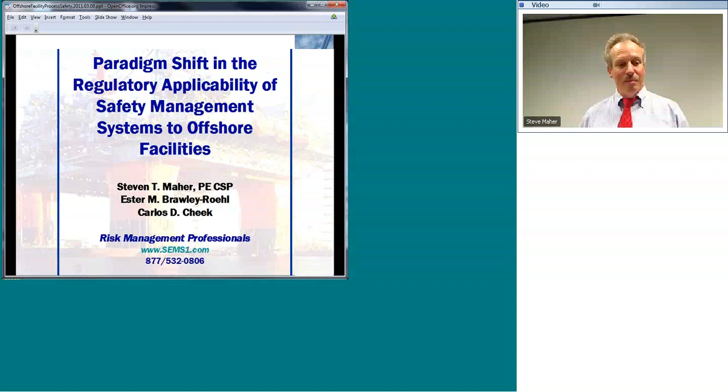What I'd like to do is compare those requirements to other regulations that are out there. With those parallels, I really hope to provide some tips towards effective implementation and how to make the overall program very effective. And of course, I'll be opening up for question and answer.

Okay, let's go to the next item too. What I'd like to focus on is making the audience understand what's been happening and why, and contrast the different regulatory requirements, and also suggest some effective approaches for implementation.

The key events in 2010 that have driven this: 2010 started with a very positive outlook on offshore facilities and offshore facility safety. In fact, on March 31st, the President announced in his speech the expansion of offshore oil and gas exploration, just weeks before the tragedy associated with the Deepwater Horizon accident, which resulted in 11 fatalities, 17 injuries, and over 4 million barrels of oil released in the Gulf of Mexico.

There was a restructuring order for a fresh look at the Minerals Management Service and all the things that were done, and that was completed in May, when MMS was restructured. A moratorium was put into place, and throughout the course of the year there was pretty much a downward spiral towards a very negative attitude, which is how the year ended, towards offshore oil and gas exploration in the Gulf of Mexico. In fact, on October 15th, 30 CFR Part 250 was promulgated, which is basically the SEMS requirements.

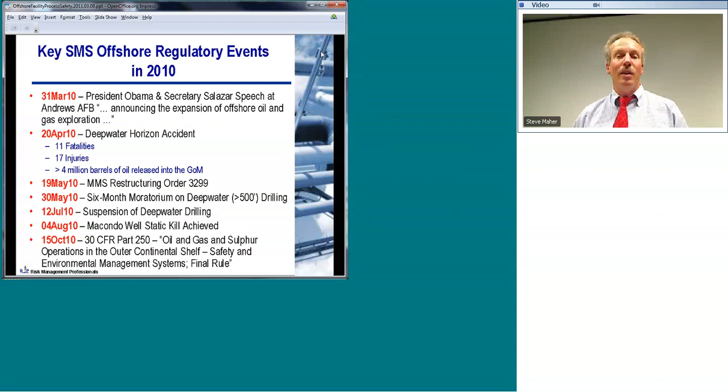I'm not planning to review all the different aspects of the regulation or all the background. If you need more information, there are some references towards the end of this presentation too. www.sems1.com is a good reference; it provides copies of the regulations and also links to all our SEMS Offshore webinar series that provides a lot of background and other tips.

So what I'd like to do is start by discussing what causes accidents and the types of regulations that are effective for addressing those different causes. Accident causes and performance indicators.

Incidents are rarely caused by just a single catastrophic failure, but usually by multiple events or failures that coincide. There's a Swiss cheese model, a spinning disk model, that have been very useful for describing this. Typically, hazards are contained by multiple protective barriers, and the idea is that there are weaknesses or holes in these barriers, and it's when the holes align that the barriers are neutralized and you can have an accident. That's one visualization that describes process safety type events very well, which tend to be catastrophic and involve multiple events happening at once.

The other aspect is different — personal safety. Those typically are more direct types of events. So let's contrast the two.

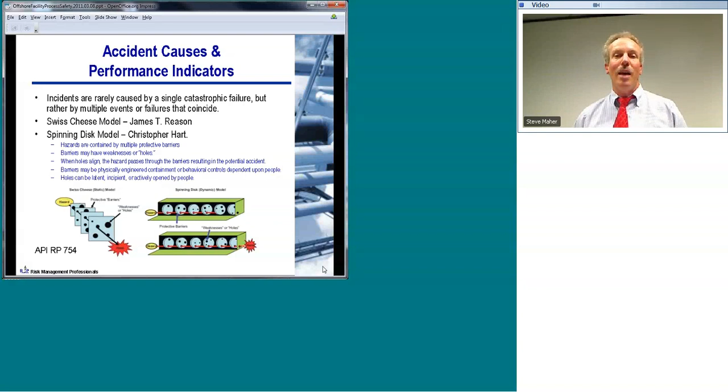General types of offshore facility risks that people need to be aware of are personal safety and process safety. To contrast the two, consequence measures for personal safety are usually done in terms of lost time injuries, whereas for process safety these can be serious injuries, financial impacts, environmental impacts, even fatalities. For personal safety issues, key control measures include design, PPE, and attentiveness to job activities.

Controls for process safety have gravitated towards safety management systems — that's the SEMS acronym I'll use frequently in this presentation — and I'll describe why these are good control measures for process safety type events.

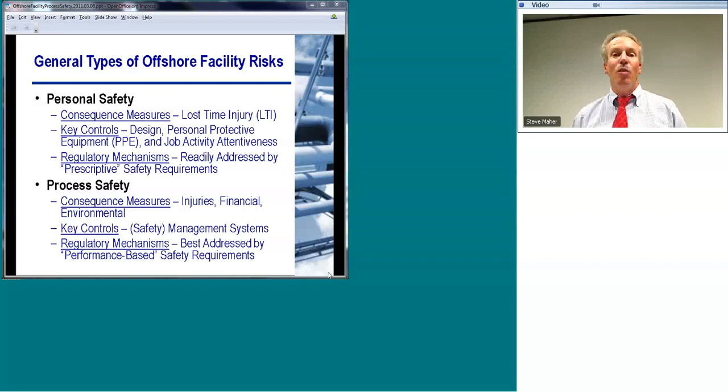For personal safety, prescriptive safety requirements are typically very effective, but for process safety, performance-based safety requirements are typically more effective.

There is a lot of overlap between personal safety and process safety, however there are some significant differences. If you look at an offshore facility, comparing slips, trips, and falls to major accidents, there's a pretty limited correlation between the number of slips, trips, and falls type events and the number of major accidents. So although there's some overlap between the different types of safety, there are significant differences between the two.

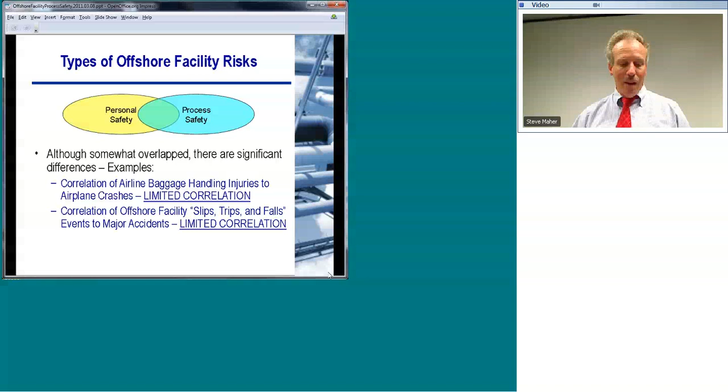What are prescriptive and performance-based regulations? Prescriptive regulations typically state what actions and requirements to do, and they're very specific in terms of what needs to get done. Goal or performance-based regulations look at objectives or the desired outcome and leave the method for achieving those objectives up to the facility operator.

As we discussed before, performance-based regulations are better used for safety management systems types of approaches, and prescriptive regulations are better for personal safety.

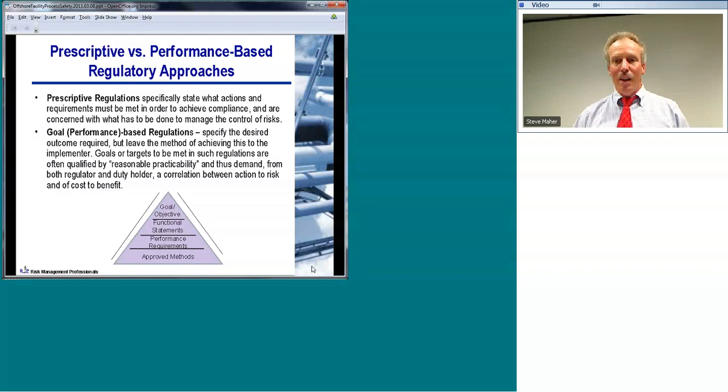For the rest of the discussion, I'd like to focus on process safety issues and performance-based regulatory approaches, and then discuss parallels between the onshore and offshore safety management system regulation development.

We already briefly mentioned the Deepwater Horizon event that happened in April 2010. Let's take a look at a couple of other pivotal events in history that have had a big impact on process safety and performance-based regulations.

The Bhopal, India accident in December 1984 resulted from procedural errors and a reactive chemistry incident that caused a large release of methyl isocyanate, which reacted exothermically with water. This exothermic reaction resulted in a lot of heat, a large pressure increase, challenge of the relief valves, and a release through the relief valves.

A lot of the control systems were disabled, and key protection systems were disabled, both without any management of change program implemented, resulting in 40 tons of methyl isocyanate released into the community, almost 4,000 lives lost, and over 100,000 permanent injuries. It was considered a very pivotal event not only because of the magnitude of the tragedy, but also because people took a fresh look at performance-based regulations and safety management systems.

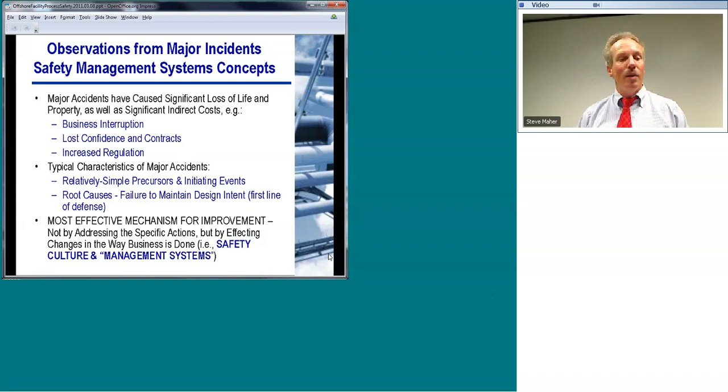Bhopal, India happened in December 1984. And it was very quickly after that, in 1985, that the Center for Chemical Process Safety was formed, and the Technical Steering Committee, I had the privilege of serving on that for several years in the mid-'80s, was formed. And one of the first things they did is they recognized this need for control of safety management systems and having an appropriate control factors put in. And in 1987, they put out guidance for technical management of process safety.

This was a good guidance document put out by the CCPS, which was an element of AICHE. In 1990, the API put out Recommended Practice 750, just a few years later, using much of the same concepts, but focused more on the petroleum industry.

These were initiatives initially taken by industry and, in general, very effective, but their application was optional. So to provide consistency and to avoid a situation where a company that did not want to go through and properly address these requirements so that everybody had an even basis from a competitive perspective, and for applying appropriate levels of safety, OSHA promulgated Process Safety Management in 1992, and EPA promulgated Risk Management Programs in 1996.

All these, for onshore facilities, were driven by events that occurred in the 70s and 80s, the pivotal event being Bhopal, India in December 1984. The important things to recognize are the fact that industry did take an initiative first, and the regulations that came out afterwards closely paralleled what the industry guidelines were, with, of course, some differences, but there are more similarities than differences. So that's the top arrow, and that covers the onshore facility applications and leading to the regulatory environment that we've got now for safety management systems.

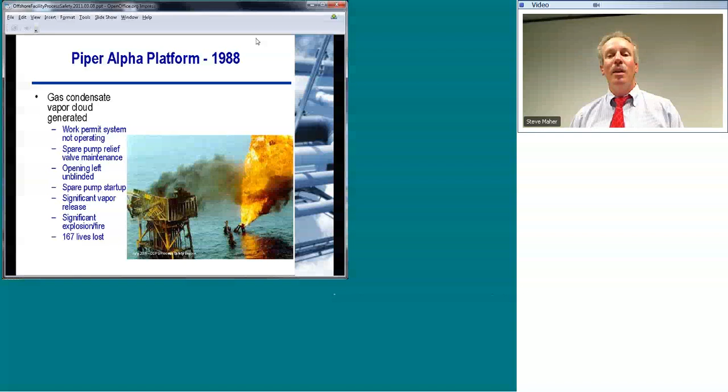Another key observation is that throughout this entire time period, from the mid-'80s to current day, a lot of the details and specifics for developing safety management systems and their various elements - whether for onshore facilities with a wide range of technology applications, or offshore facilities with a wide range of applications - many of the different elements are very common across all these. Thousands of people have looked at these and come up with the elements that are part of PSM, RMP, and SEMS as paramount to implementing safety management systems at a whole lot of different types of facilities.

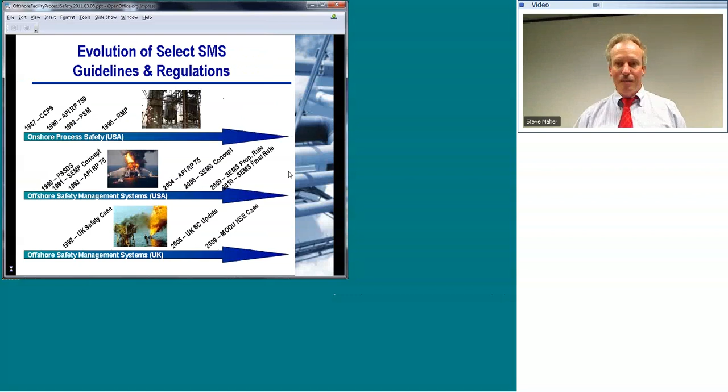Okay, next, what I'd like to do is look at what's the environment right now. Well, as of March 2011, you've got a wide range of applications, with SEMS making heavy use of references to SEMP and a lot of the key safety management system elements that are very familiar to folks who've implemented PSM and RMP. These are management system elements - there's not a lot of detailed calculations or other types of requirements. It's basically about managing the level of safety at your facility.

Typically, they require a lot less effort than areas of the world where specific safety cases are required. Safety cases also involve safety management systems as well as risk assessment and quantifying that. So the SEMS programs basically require less effort, while safety cases provide a bit more insight. But for the United States right now, the application of SEMS is pretty well balanced, and at this point there's not a major drive toward implementing safety cases.

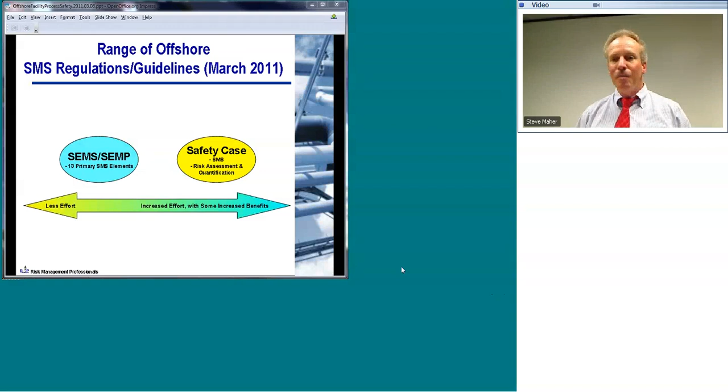And so that's how it fits into the overall framework. What I'd like to do next is take a broad look at the regulatory programs and the importance of protection system design in evaluating risk. The first thing to do is look at the interdependency of technology, risk, and regulation.

Basically, the inherent risk of offshore drilling and various platforms drives the need for safety instrumented systems, various levels of design, and the reliability associated with that. Then, those designs and additional protective features with inherent reliability feed the ability to deal with facilities that are potentially more hazardous and complex. When you're looking at higher hazards and more complex protection systems, the various facility risk analysis techniques also need to be bumped up. So basically you've got a whole cycle of technology and safety systems matching the types of hazards associated with various facilities, including offshore.

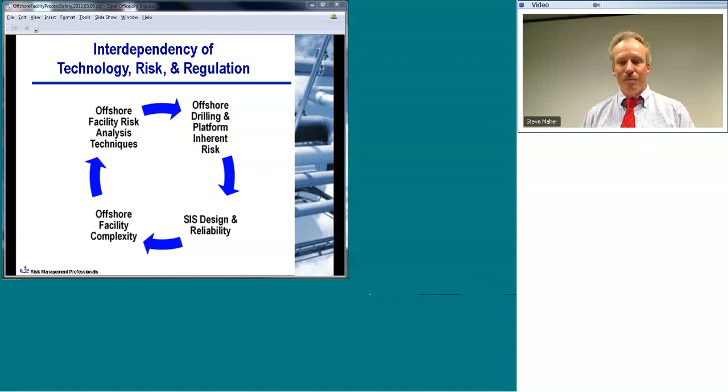To get a good understanding of this, it's important to understand the big picture. Basically, safety management systems and managing safety at offshore facilities is all about understanding risks. Understanding risks means understanding likelihood and understanding the severity of all the various events that can lead to and build into your risk at a facility.

Understanding those, just looking at the likelihood, doesn't tell you a whole lot. You can have a highly likely scenario with very low consequences that's not very important. Just looking at the consequences doesn't tell you a whole lot either. A very high consequence event that really is not possible, there's not much you're going to do about that, so that doesn't tell you a lot either.

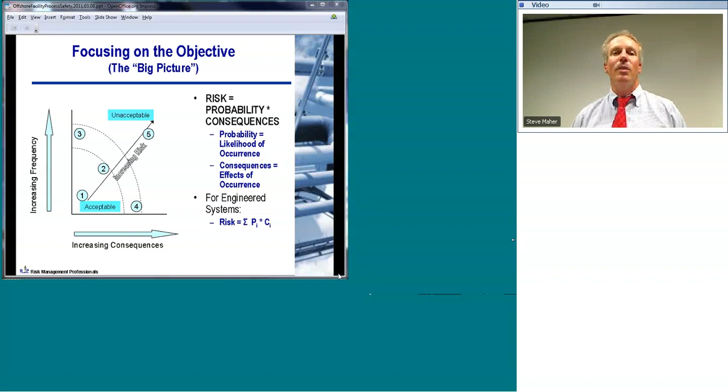So it's really balancing the likelihood and the severity that gives you the insights that help you manage the safety at a facility and understand if there are weaknesses that need to be addressed and improved upon. So this is the whole foundation for looking at your facility and applying the various management systems and what level of technology you need for controlling risk at that facility, the different levels of protection features, etc.

So that provides an overall framework. And the thing to keep in mind is that as we develop technology further, if we're trying to keep risk constant and we're looking at more and more hazardous facilities, then really you've got to decrease the scenario likelihood.

If you want to lower risk over time, and if you're looking at consequences that are increasing because you're dealing with more highly hazardous facilities, then you've got to decrease the scenario likelihood even further. So this whole idea of the protection system design and reliability is basically an integral part of maintaining risk at the levels that are acceptable for your situation, your operations, and your company.

And so what does this mean for safety system reliability for events that can have large personnel consequences, large environmental consequences, or large impacts on ports, harbors, or shipping?

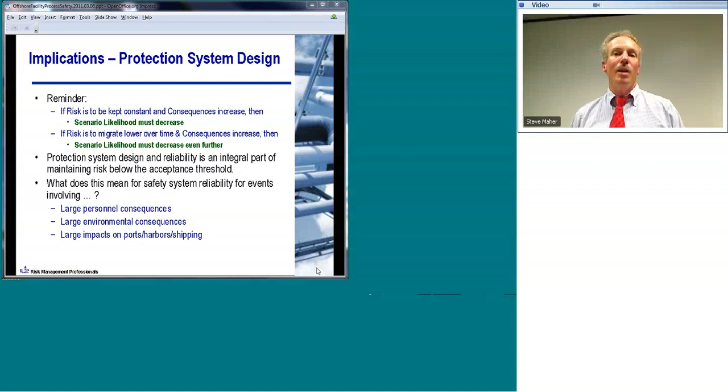Now going back to our different designs of basic process control systems, safety instrumented systems, and high integrity protection systems, there's been a lot of evolution over time. And even now there's a very wide range of implementation.

There's a very wide range of implementation at various facilities. Some older facilities, or even some newer designs with simple processes, can use analog devices, very simple types of control and protection systems that have a low cost associated with them. And if they're tried and true, good reliability associated with that.

As you're dealing with more highly hazardous processes and more complex systems, you're applying - and this has been an evolution of these electronics and other devices available for control and protection systems - increased redundancy, higher pedigree devices, increased diversity, applying voting logic. There's a whole science behind the application of instrumentation to match the level of risk at a facility and the specific scenarios involved.

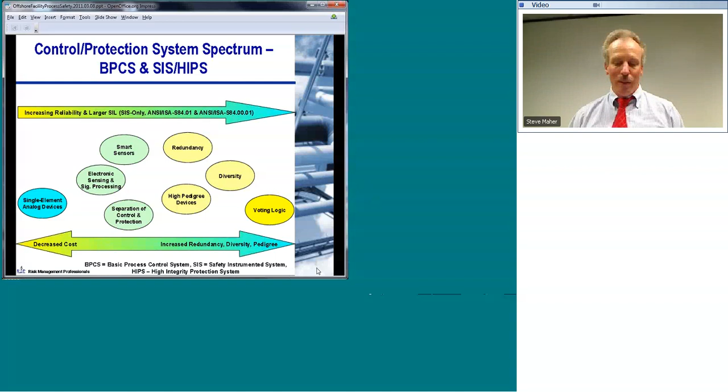As I mentioned before, one of the key pivotal events for offshore facility safety systems, as we're going from simple analog devices into more advanced electronics and the application of intrinsically safe electronics, was in 1990 when we did the process safety shutdown system effectiveness study.

This was done - I had the privilege of being involved with this - for a variety of platform types: very complex in Stratfjord, medium complexity in the Gulf of Mexico at Green Canyon, and also very low complexity off in Nigeria. We took a look at what systems were out there, where electronics was going, looking at a wide range of protection system applications from pneumatic to electronic, and what was really dominating that.

And the same kind of findings that we found back in 1990 really apply today too. With the appropriate logic processing units or electronics, whatever voting logic is appropriate for the level of safety that you need, still the end devices and also the actuation signals and the transmitters tend to drive this.

These types of conclusions are important to keep in mind and have been a mainstay all throughout this evolution of various control and protection features.

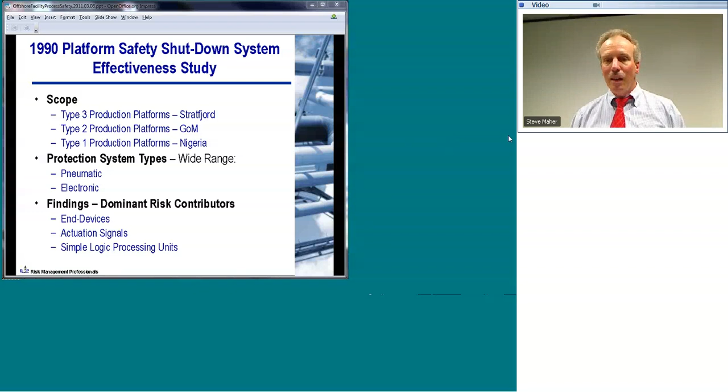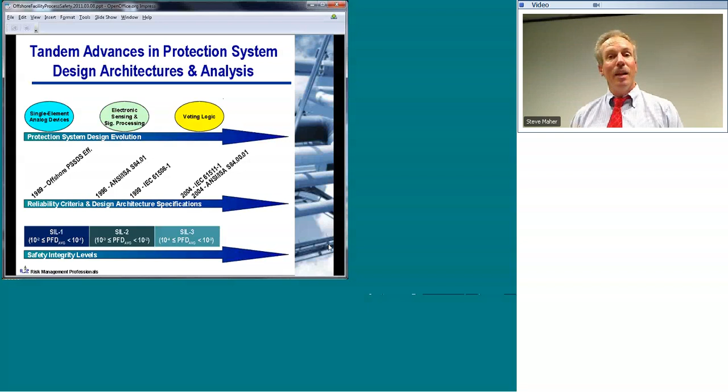Today you're going to be looking at the implementation of safety and environmental management systems as part of 30 CFR Part 250. But as we go more into deeper waters, more highly hazardous situations, you're going to see that the previous bar with the complexity of the regulations also going up to meet that, and probably at some point in the United States—probably not for quite a few years—the application of safety cases will be a requirement for offshore facilities. But that's not a requirement now, so we're going to be focusing on safety and environmental management systems.

As a reminder, as we develop the technology more, if we're keeping risk constant and your potential consequences are increasing, you've got to decrease scenario likelihood. How do you do that? Basically control and protection systems in terms of design, and also management systems in terms of how you operate it. So this feeds right back into your design guidelines, redundancy and diversity, what kind of design configurations you've got, protection system reliability, and also the mechanical integrity program that you put into place to make sure you're evaluating and maintaining the reliability of these protection features where they should be.

It's important to remember the limitations of prescriptive standards. With all the different designs out there, with the changing paradigm of what's an acceptable risk threshold, with the lessons that all the folks in the offshore industry have learned after Deepwater Horizon in terms of potential consequences and potential impact on business, it's very clear that prescriptive standards just can't cut it. That's why you need performance-based standards and mechanisms to adjust the detail and type of implementation based on the specific facility.

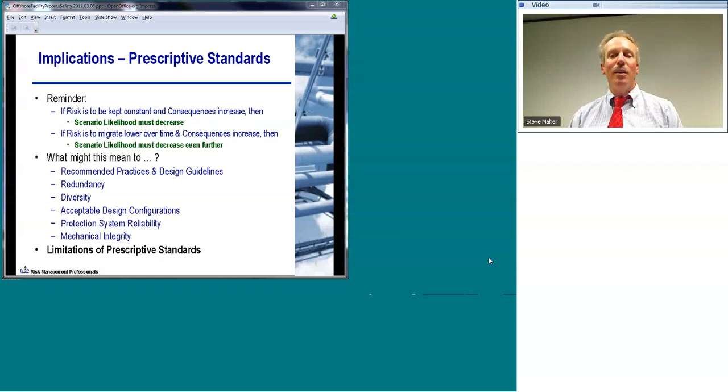So given the fact that safety management systems are out there and they're really here to stay, and there's a good reason for them, what I'd like to do is take a little bit of time and show you the universe of what's out there with respect to safety management systems, and give you some definitive tips on how to link SEMS to your other programs, hopefully saving you some effort.

First of all, let's make sure we're clear on what SEMS is all about. The Safety and Environmental Management Systems requirements from 30 CFR Part 250 basically include all the key elements on your screen. Going clockwise: safety and environmental information, which is a core part of understanding your design and being able to communicate key safety issues; hazards analysis, also understanding the potential hazards so you can correlate that and have a platform for identifying potential weaknesses at the offshore facility.

Management of change—a lot of major industrial accidents have occurred because people have made changes without really evaluating the total potential impact of that change. Operating procedures, basically being able to operate it safely, safe work practices, training programs to make sure your operators understand potential hazards and how to operate it to prevent accidents from occurring. Mechanical integrity, pre-startup reviews, emergency response and control, incident investigation and auditing, and records and documentation.

The four in red are red for two reasons. Number one, those are the four elements that in 2006 were highlighted as part of the initial SEMS rule as being the most important ones to implement first—importance gauged by accidents that have occurred in industry, and also what the MMS wanted to regulate. The accidents have occurred, and a lot of citations have been issued for deficiencies in various programs. Hazards analysis, MOC, operating procedures, and mechanical integrity have been key parts of that.

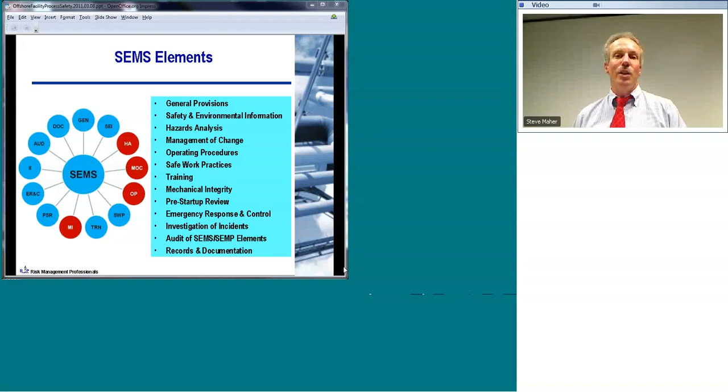The other key point is that some of these other elements too deserve a lot of attention for SEMS, and we'll go into that in a few minutes.

So this is maybe a little complicated, but it's meant to illustrate the area in green, which is the overlap between the key programs we've been talking about: Safety and Environmental Management Systems and Programs, SEMP being the name put forth by API Recommended Practice 75 and the current regulatory standard, and process safety management and risk management programs. The majority of the effort and elements are, for all practical purposes, identical.

One key thing to point out is that over the years, as process safety management and risk management programs have evolved, it's been 19 years since PSM was promulgated and 24 years since the AICHE CCPS guidebook came out. From that initial guidebook, even though there are a couple fewer elements compared to current applications of PSM, RMP, and SEMS, you're not looking at major differences in strategy or philosophy. In fact, there's more in common than not.

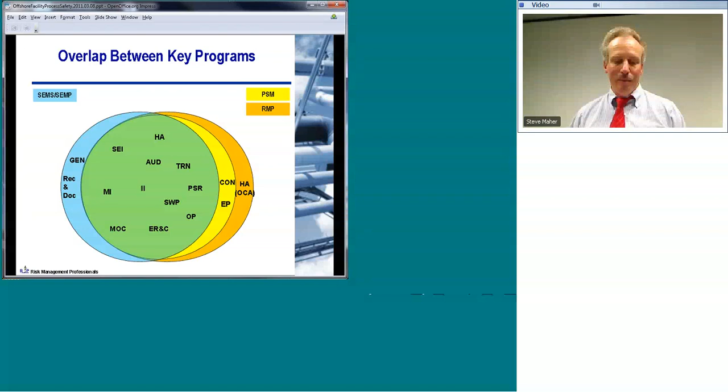This is hopefully a handy table with regulatory citations for the different elements, using the terms identified in the SEMS requirements. The column in the middle is twofold: the API Recommended Practice 75 with specific section numbers, and the specific section numbers for 30 CFR Part 250. The concept of Recommended Practice 75, which pretty much synchronized with other programs at the time, was adopted at length by the current SEMS requirements.

I'm also providing citations for OSHA PSM requirements and EPA. EPA is 40 CFR Part 68, and OSHA is 29 CFR 1910.119. Hopefully this is a handy table—where I'm going with this will be clear in a few minutes. If you're a company with business units onshore and offshore, this can help communicate and maybe help develop standard procedures rather than reinventing the wheel.

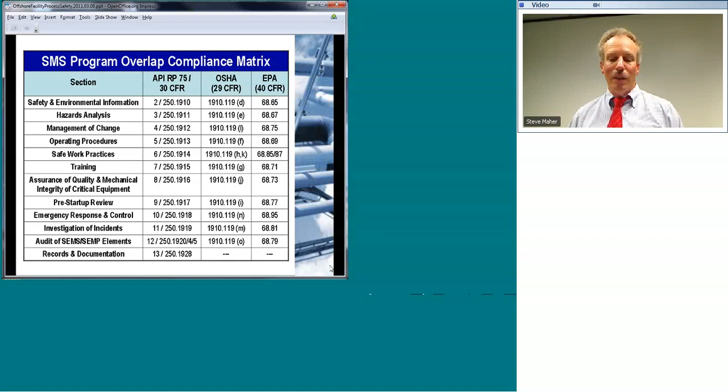What I'd like to do is go through this fairly quickly and only hit the highlights. If you don't already have a copy of this, I'll make sure one gets sent to all participants. The paper written for the Global Congress next week has a lot more information and details contrasting these two.

My main interest is showing you the differences from the SEMS program to PSM and RMP, so that you can make use of resources in your company, hopefully save you some time and effort, and make things a little easier to implement at your facility and throughout your company.

If you look at safety and environmental information—process flow diagrams, block diagrams, P&IDs, electrical area classifications, platform layouts, siting layout information, etc.—the actual differences conceptually between what you're asked to do for offshore and onshore programs is very minimal. If you have a good handle on what needs to get done for onshore facilities, you can apply that to offshore.

For hazards analysis, there are some key differences. In fact, the poster we're presenting at the GCPS actually highlights this one in red. Hazards analysis and auditing are the two biggest differences, and I'll go over auditing in a few minutes.

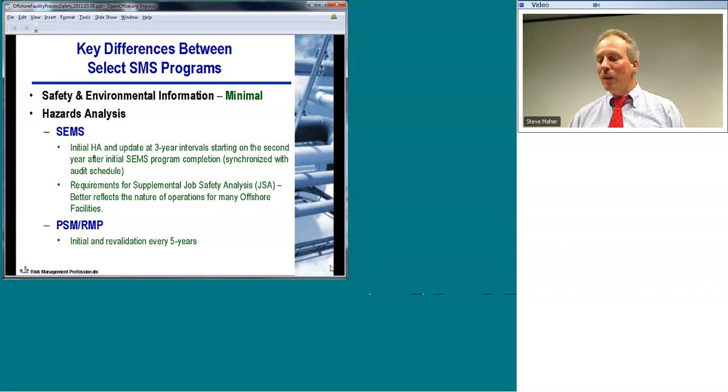Okay, going down our list of the key elements, management of change, very minimal differences between offshore and onshore regulations. By the way, if you want more details, the paper we'll send you a copy of has a lot more details in a table at the end that provides hopefully a real good basis for you to move forward, with some tips on how to keep things streamlined.

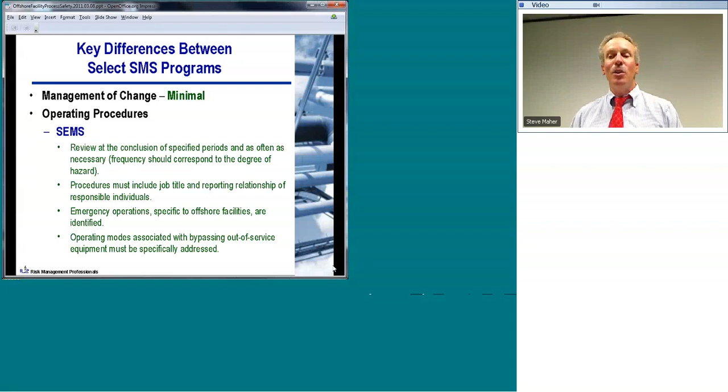For operating procedures, for the SEMS program, there's a requirement for review at the conclusion of specified periods and they don't tell you what that frequency is. The procedures must include the job title and reporting relationship, emergency operations specific to offshore facilities, and that facility needs to be identified. Operating modes associated with bypassing out-of-service equipment must also be specifically addressed.

Operating procedures also must include impacts to the human and marine environment, and procedure changes must be communicated to potentially affected personnel. Again, recognizing that there's a little more challenge to a lot of offshore facilities because of heavy use of contract personnel.

One of the differences for process safety management and risk management programs is a clear requirement for annual review and recertification. The review period for offshore is not specified. Again, performance-based regulations, you need to decide when it's required and put that into your program.

Next element, safe work practices, very minimal differences.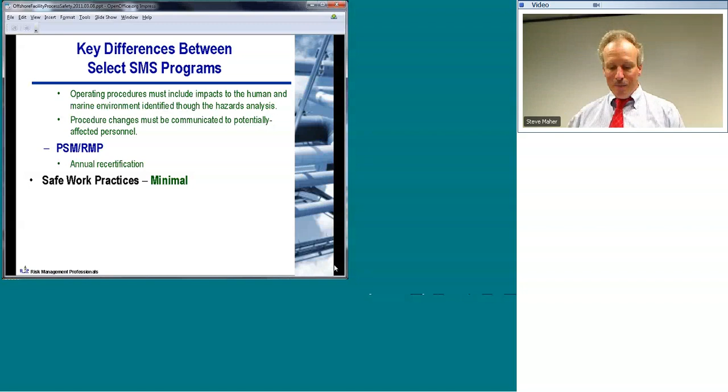Training. For the SEMS program, there's not specifically a training frequency, but because of the characteristics of offshore facilities, it does recommend the use of drills as an element of the training program. It references API recommended practices for training programs and program details, requires documentation of instructor qualifications, and you also have to make sure you do training for operating procedure changes, safe work practices, and emergency response and control. SEMS is picking up on things that are specific to offshore facilities and are things they've seen as potential deficiencies for other facilities onshore in the past.

For PSM and RMP programs, there's a specific training frequency identified, basically refresher training every 3 years. Again, that reflects some knowledge learned over the years and the fact that there are differences between onshore and offshore facilities.

Okay, next element is assurance of quality and mechanical integrity. This is a big part of your program. It's a very important part of your program, but it's an important part of all safety management system programs, so there are minimal differences between PSM, RMP, and SEMS.

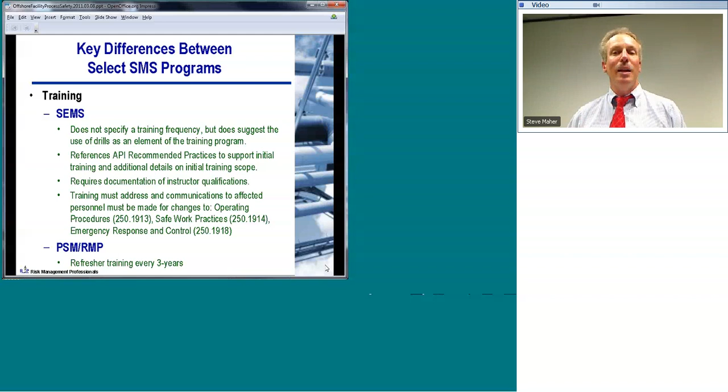Pre-startup review, very similar. And in fact, for those of you who are implementers of these various process safety programs, these are linked together in a lot of cases. The pre-startup review is very closely linked with management of change.

Emergency response and control for the SEMS programs. The update requirements aren't specified. However, there are clear requirements for an emergency action plan, designated emergency control centers, and conducting training and drills, again recognizing some of the unique characteristics of offshore facilities.

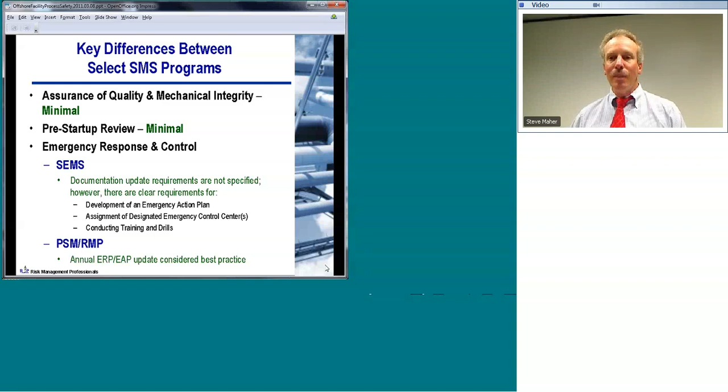Next element is incident investigation. PSM and RMP require initiation no later than 48 hours following the incident and retaining the incident investigation reports for 5 years. SEMS is a little bit looser, actually, in that it says initiate the investigation as promptly as possible, but they don't give a specific time period. They want the findings retained for use in the next hazards analysis update so that it's subsumed in by some mechanism and reviewed by your hazards analysis team.

You want to also correlate the investigation findings and corrective actions to specific root causes. These are lessons learned from applications that maybe haven't gone so well for onshore facilities or PSM and RMP. And also you want to distribute relevant findings to similar facilities, as well as other affected personnel. Again, a recognition that in the offshore world, there's a lot of facilities that are very similar, so events that occur at one location can have a very widespread application where people can benefit from the sharing of knowledge as a result of these incident investigations.

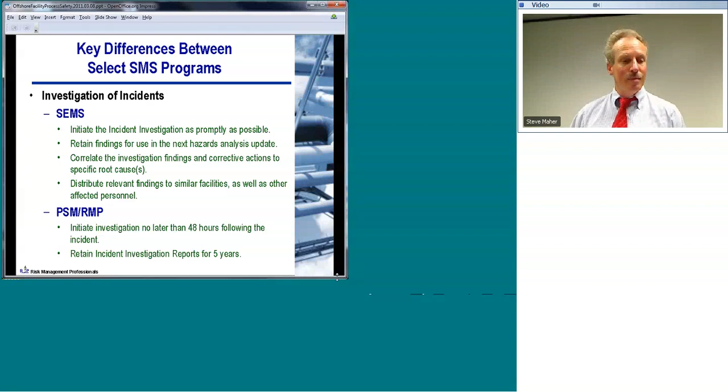Next slide. The next key element is auditing the SEMS and SEMP program elements. This is a big difference, and this is one I highlighted in red on our GCPS poster board. This element is going to cause a lot of work, and there's a lot of checks and balances here in terms of communicating with BOEMRE. These audits are required at 3-year intervals starting in the 2nd year after the initial SEMS program completion.

Recognize here's that 3 and 2 period that is synchronized with really the hazards analysis. In fact, they want you to synchronize the hazards analysis with the audits. And also, I think a lot of the reasons why they had different time periods for these go back to the discussion we had just a few minutes ago. There's a specific requirement for submitting an audit plan to BOEMRE within at least 30 days before the audit. That gives them time to review it and validate that you're taking an approach that's acceptable to them, and I'll tell you about that in just a second.

You also, after the audit, within 30 days of audit completion, you have to get a report to BOEMRE. They've noticed in the past that a lot of folks had done the audit, not done a good documentation for a period of time, and they want to speed that up so that BOEMRE can review that, take a look at the audit results, and take corrective actions on their end as need be.

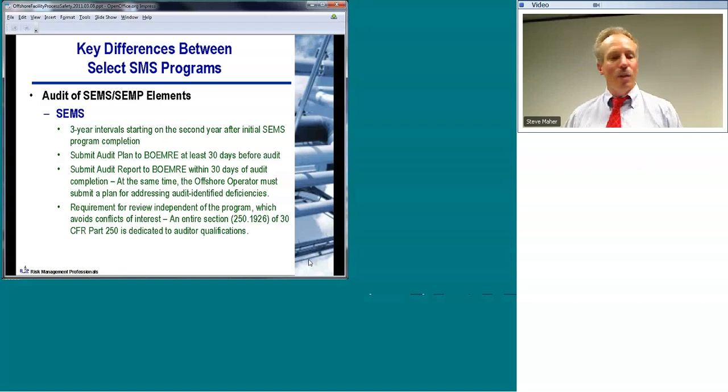For PSM and RMP programs, audits are done on a triennial basis, a much simpler clock. And even though it's a simpler clock, because it's desynchronized for PSM and RMP with process hazard analysis updates and the submittal update, there have been a lot of snafus where people don't recognize and get their audits done on time. So I believe that's why BOEMRE is trying to synchronize that, along with the importance of the elements. For PSM and RMP, there's a requirement to retain the 2 most recent compliance audits.

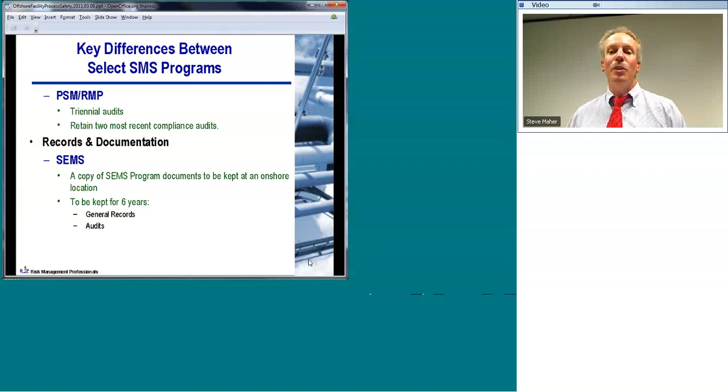There's also a records and documentation section for SEMS. You've got to keep a copy of the program documents at an onshore location, and also for 6 years, you've got to keep general records and also audits. Next slide.

So for 2 years, you've got to keep JSA records, management of change documentation, injury and illness log documentation, contractor safety policy and procedure evaluations, and the records have to be kept orderly, readily identifiable, retrievable, and legible.

So I would gauge from this that there's going to be a lot of interest for BOEMRE personnel to be reviewing their program and working directly with a lot of the offshore facility operators to look at how robust your SEMS program is and how well it's being implemented.

For PSM, RMP, there's a lot fewer specific requirements. Just basically it says supporting documentation must be kept for 5 years.

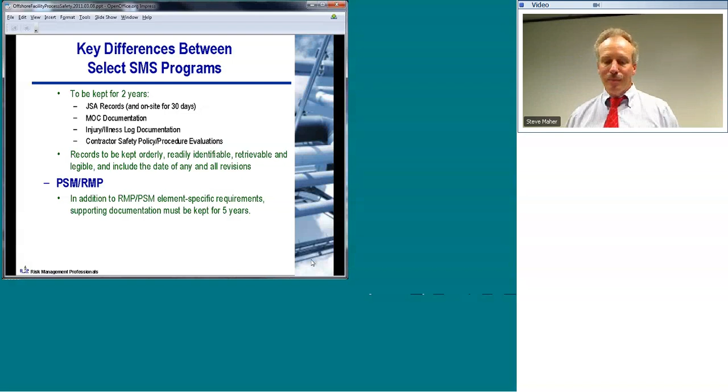Next slide, please. So now we've looked at the evolution of these regulatory requirements and where they're coming from, what they're trying to achieve, why you're doing performance-based requirements, a lot of the technology applications, and the evolution of the analysis techniques over the past couple of decades that emulate technology changes, changes in the level of hazard at facilities, and also, again, linking this to various program elements.

So now what I'd like to focus on, since I've contrasted the different programs, I'd like to talk to you about organizing an effective SEMS program. Next.

Next slide. Okay, good. So very importantly are business issues, of course. We have to maintain a level of safety, and we also have to make sure that you maintain the business viability of a facility operation.

The clock is ticking, and a lot of facilities have to implement their SEMS program by November 15, 2011. For a lot of facilities that have an entrenched culture, that have been part of companies that have had programs that have been provided to them, or things that are very similar to PSM, RMP, or SEMS, there may not be a lot of work to do.

Or it may be very easy to just look at the differences that I've been contrasting and morph your program to address those differences. However, there's a lot of facilities out there that really haven't done this in depth and haven't provided a robust program, and certainly not to the level that would withstand the scrutiny of a BOEMRE audit or somebody else taking a real good look at the program.